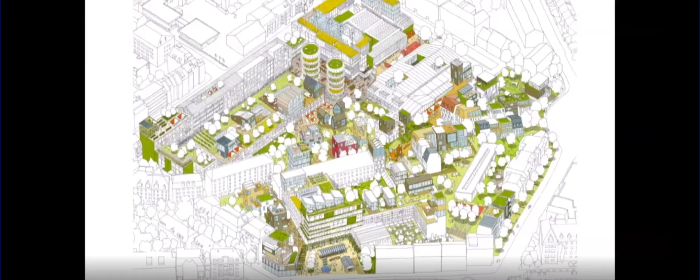energy consumption, energy production. We overframed and overbuilt the existing houses with extra structures based on the strategy of renewable materials, wood constructions, loam, earth constructions, a lot of greenery to trigger the microclimatic aspects of the situation, and also to have a kind of resilient community, completely self-sufficient when it comes to energy production and energy consumption, and to use every square meter for people.

So what we realized in this commission is that technically we have all the tools needed to develop a zero carbon neutral urban strategy. The most difficult thing is that we have to treat the way of living differently.

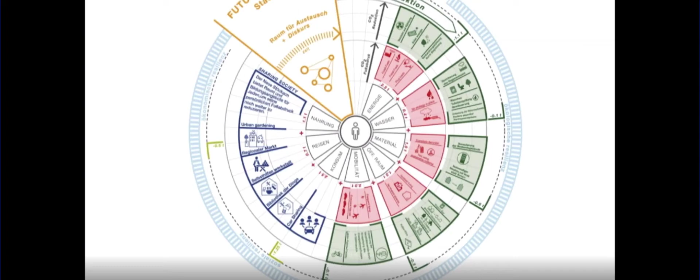Technically, we as architects know what to do, but the sharing society needs to have a change in society. That was one of the outcomes of this commission. I'll also show you, when it comes to commissions, how we deal with this resource base differently.

So we were challenged by a commission and competition for the Guggenheim in Helsinki. You may have heard about this competition, 1,700 entries. We were lucky to be one of the finalists.

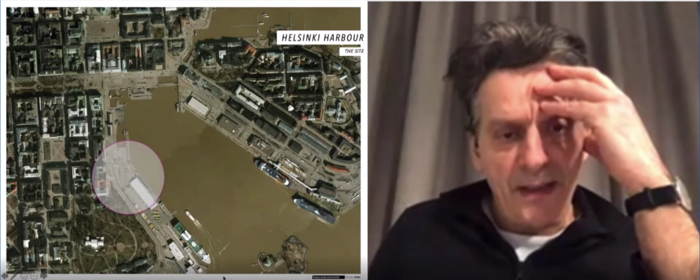I want to show you how we approached this architectural commission. The site is very nicely located in the harbor area, the harbor front - a perfect site for a museum, I would say, or you would say. But then on the other hand, why should we consume all of the area alongside this harbor for only one user group, for the museum goers?

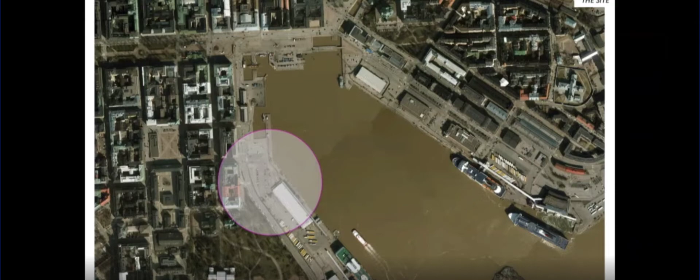We thought, first of all, let's check what extra quality we can place in that building besides just being a museum between 9 a.m. and 5 p.m. We took a careful look at what kind of public events happen in Helsinki, and where we can add some quality throughout the year.

That event calendar we developed together with some urban consultancies. We worked together with Gehl Architects in Copenhagen, you may be aware of this firm, and we wanted to generate extra value besides being only a museum.

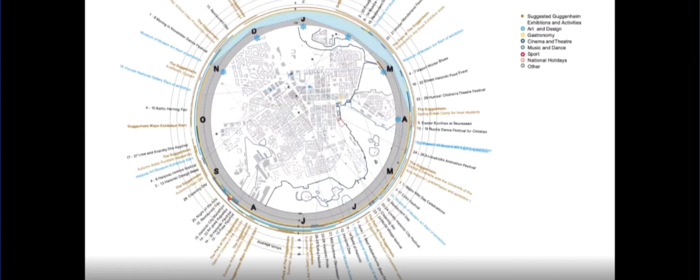We realized it would be perfect to have a public space where you can celebrate the festival of the sun coming back in the spring period, because like all northern cities, the lack of sunlight is a big issue. Celebration of light, having outdoor areas well protected against wind, nicely sun-lit, it's a quality. Having a public space not limited to museum goers, that's where we could see extra value.

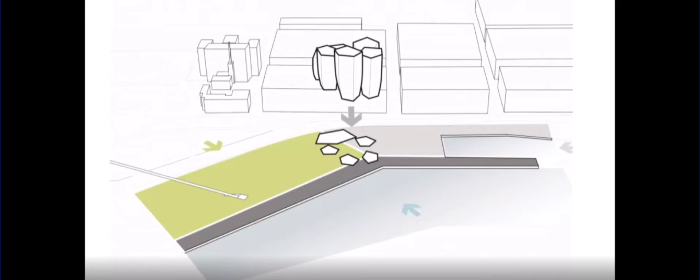The other thing was that we shrink the footprint of the building to a minimum. We only consume as much of the green area of the site as necessary. We only need a bit of a footprint, to open up the area for future development, save the resource of space, and generate a very compact, publicly accessible museum. For me, the strategy for a complete sustainable structure is that you don't start with materials, you start with the resource base, you limit yourself, you shrink the footprint as much as possible, and then you deal with materiality.

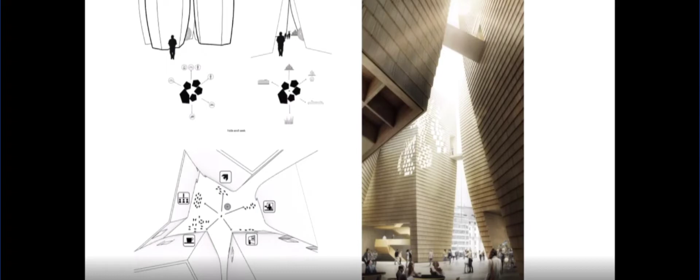So the five wood towers share a public space and shelter it against strong winds. They're placed like a Stonehenge, a 'lighthenge,' to allow sun penetration on the 21st of March and the 21st of September, celebrating the Festival of Light in the public space between the towers.

We thought about what else could be embedded, what people might look for when they enter the site. So we generated places like a viewing platform on the rooftop, and garden facilities next to the tower, in the sheltered outdoor area against strong winds. We looked for possibilities to have a 24-hour environment and quality for this museum.

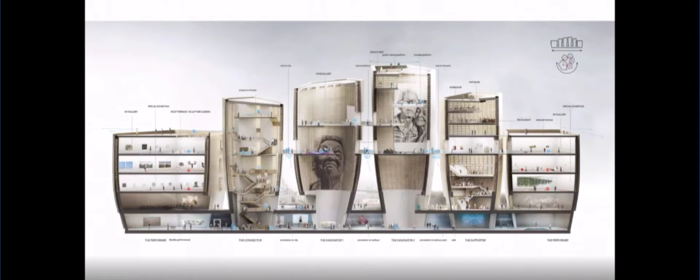I don't want to show you the interior, that's a bit too much for today. I just want to give you an idea of how we approach any of our commissions. And when this question of space is positively answered, then it comes to materiality.

You are very fast forward when it comes to wood constructions. We in Germany are running up a bit better now, so we have a couple of wood constructions coming ahead. When it comes to natural materials, the quality is not only that we found them, they are regrowing, and they don't make any waste. When we deconstruct something, we can reuse them.

There's another absolutely important aspect: the emotional linkage to the users. People like these materials, they like loam, they like wood, because it reminds them that we are part of nature. This emotional link to architecture is such an important aspect, it means architecture is kept for a long period, that architecture is durable. One of the second strategy measurements for good sustainability is that when you build, you should build for as long as possible.

All of our life cycle analyses show us that, especially as energy consumption becomes more efficient, the embedded energy of the construction is unbeatably high in comparison to the user energy. It only makes sense if the construction is in use for more than 25 years, it should be 50 years, should be 75 years. For example, a classical office structure in Europe has a durability period of only 25 years. So it makes sense to build for a long period.

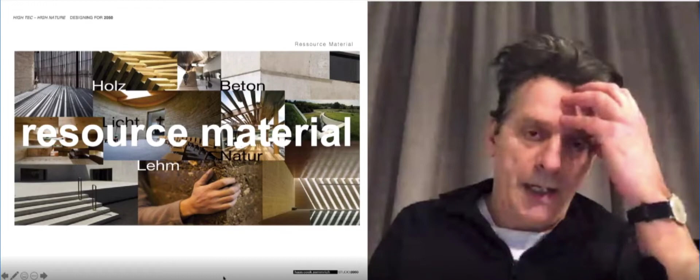A lot of pre-speech for materials. I hope a lot of architects listening to this lecture are aware about embedded energy and natural materials and their advantages, so I don't want to spend a lot of time re-arguing these classical criteria.

But again, it doesn't relieve you from a proper upfront strategy of how you build. I talked a lot about space, but then it comes to orientation, then it comes to the classical approach to architecture: build, first of all, as little as possible.

That is the approach of new simplicity, which we've talked a lot about in the last three or four years—every extra element you build is a resource. So the next strategy, beyond space and natural materials, is to just build as little as possible, and really think about the orientation. Where does an opening make sense? How much light do you really need for this kind of usage?

Because here in Germany—and in Norway it might be a similar situation—85% of the year you don't need any heating or cooling in the building, when it's properly done, when the ratio between openings and closed areas is properly considered. So simplicity means working best with the microclimatic situation, and then for 85% of the year you have no issue with energy consumption at all.

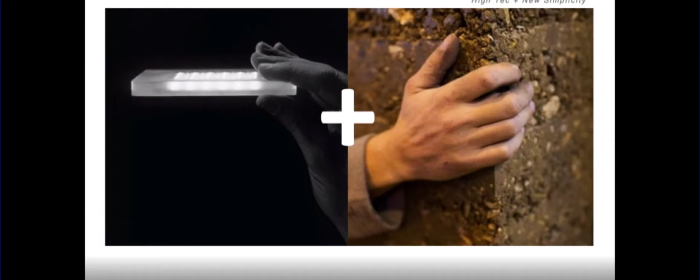That's how we work here with our architects. We think: first show me a design solution for how we can provide a building without any technology at all. It helps to think differently—too often we think from the very beginning that there is technology, heating, cooling. Get rid of this thinking, and it shows you different solutions.

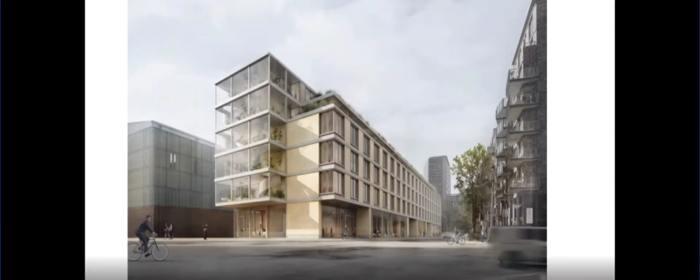I want to show you what we did here—now we come to loam and earth as a material. We were commissioned to develop a zero carbon building in the center of Hamburg for the Hafen City offices. So what we did first, after a careful site survey, was develop the concept of a wood construction with a certain grid.

We had to deal with an orientation issue that wasn't optimized, because the site itself, through the given urban situation, was a bit critical. So we developed different aspects for different facade elements. In the north area, we did a survey and realized that the wind speeds are still okay.

The street itself is quite protected through the dense urban environment against strong, heavy rains coming from the western area.

So we said, okay, in the northern area, we could really do a facade, a monolithic earth facade. The earth is a perfect situation. We find it everywhere. We can produce it locally, and we can produce this facade on site.

What we realized in our buildings so far is that with new aspects of better materials and higher efficient technology, transport is getting more and more important. The embedded energy cost, or CO2, or carbon footprint of transport is now much more than 10 to 15% of the embedded energy in the materials. So it makes sense that you use what you find locally as much as possible.

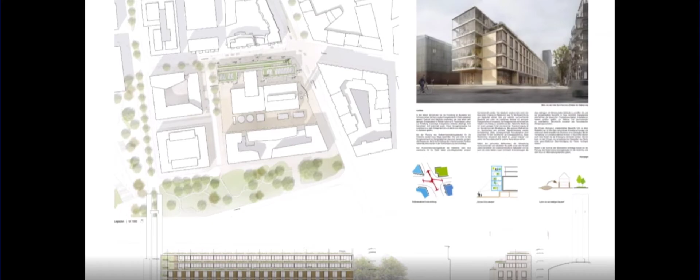On the south side, we have solar cells, vertical solar cells, for energy production. We have a wood construction as the basic grid of everything. The wood construction is not a glued one, so it's separable. We don't use any adhesives, and we have cork for insulation. We have a casein finish for the roofing, and everything is easy to mantle and to dismantle.

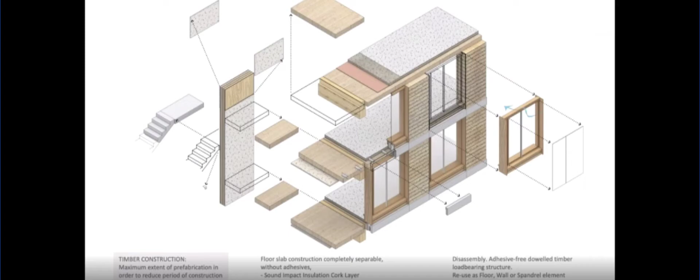So we had a radius of maximum 120 kilometers in calculation to bring clay, rammed earth, and materials such as timber to the site. So transportation is important.

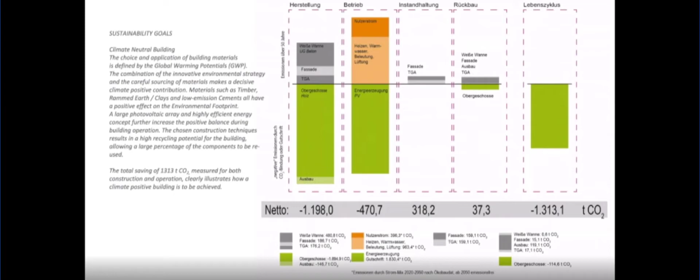That was also one of the learning exercises of a building we completed last year. That was a new headquarters for Alnatura, an organic food company here in Germany. We did with them a survey of sites for half a year to figure out what might be the best place for this new headquarters in the greater city area of Frankfurt or Darmstadt. And we finally ended with a former military camp area in the southern suburbs of Darmstadt, close by this forest. We found a couple of advantages there.

First, headquarters means 500, 600 people need to go there on a daily basis. So we have to have a good mobility strategy. We need to have public transportation in close proximity.

Next was that, and that was possible here, by reusing an existing site, we have lots of embedded energy we can probably deal with. This former military camp's sealed, paved structures were parking places for tanks, so we can use the sealed areas already for our parking lots if any are needed.

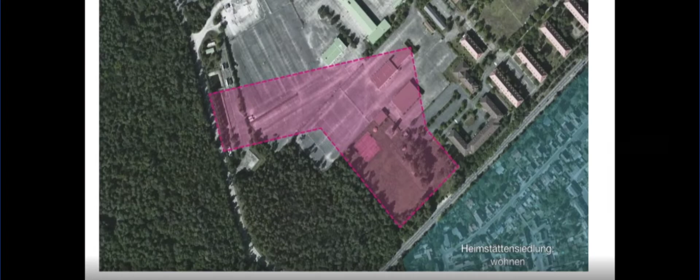We are in close proximity to a forest on the west side of the city. The forest is a perfect fresh air producer in the summer, so the microclimatic aspects are better to deal with.

And before we designed anything, we had a criteria list for this building - what kind of aims, what kind of targets we want to address with this house. That was a very important paper, ten sentences, which helped us develop that building further through the complete production and design process.

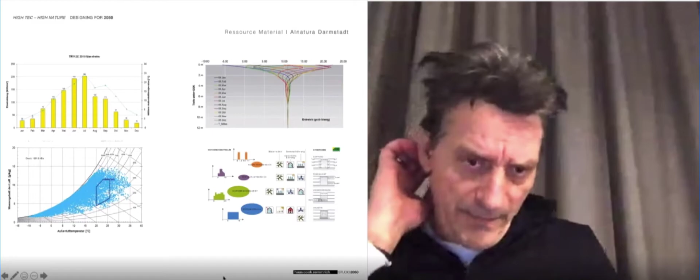We took a very careful look into synergies on site, so we did a chart where we looked into different user groups beside an office. What else can be done? We said we want to have a public restaurant - organic food means we want to show people, we want to invite people. Then we said if we redo that site, we should also have residential, we should have education. We convinced the client that together with the office structure, we should do a strategy for a kindergarten, for schooling - not just doing an office and dealing with one single user group, but have a complete strategy for all of the site.

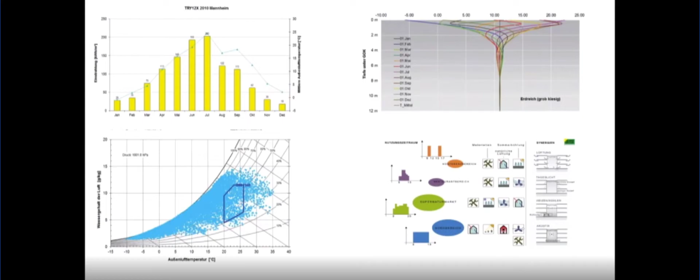That was very important. We did a survey of geothermal potential, of sunlight potential. The psychrometric chart showed us the qualities or different difficulties when it comes to humidity. And then we had a very simple approach - we made a design process.

We had a couple of models, and we tested them with the easiest challenges: how do we need to place the house on the site so we can get maximum daylight conditions? So we had a perfect north-south orientation to have at least one north facade, which allows us to have only light but no solar gains.

In Darmstadt, we have summer temperatures up to 40 degrees sometimes, so climate change already had an impact on that site. We had to deal with solar hits in the summer, and especially when it comes to an office building, solar hits are the most important aspect you have to deal with.

We wanted to have a daylight-driven office, not only to reduce the consumption of electricity, but we believe it's important for the well-being of people. You want to have a daylight accessible space. You want to be in connection to outside.

Today it's a beautiful snowy day in Stuttgart. You like to look out, you want to see that. So we developed a daylight-driven structure. We had some classical strategies: we opened the roof to the north to have direct daylight in the middle of the space.

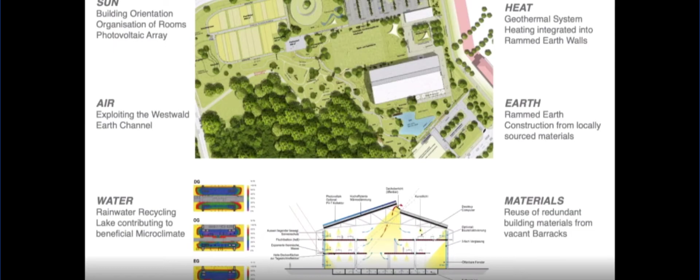The used air has space above the people's head, so the extra height also helps us have better air quality with less air speed in the building. This extra height helps us for a natural earth duct, an earth chimney, natural ventilation.

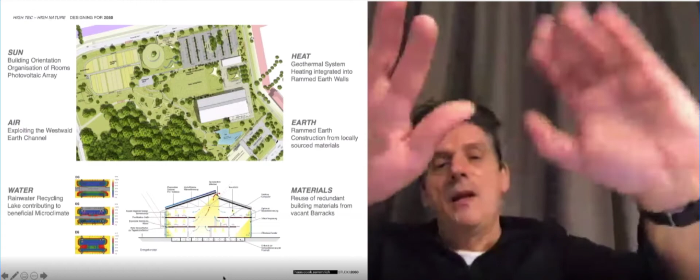So what we do is use the earth's soil. We have an earth duct underneath the building, and we suck in fresh air in front of the Westwald, and the fresh air is moved into the house by natural forces. The chimney effect of this atrium brings fresh air from the forest into the inner space. So: daylight, fresh air from the forest.

Then we collect every centimeter of rainwater, with an open cistern on the southern side of the house, and the little lake in front of the house helps the microclimatic aspects, cooling down the environment. We bring the green area as close as possible to the building, no sealed areas, in order to get rid of heat island effects in the city.

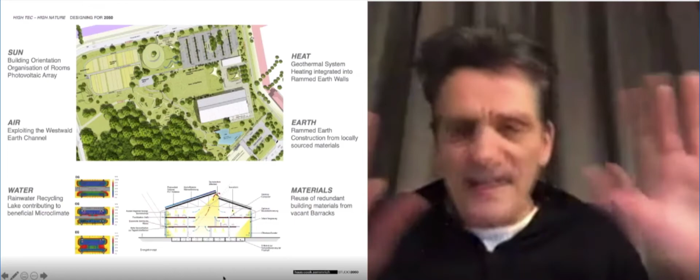Certainly we have solar cells on the roof, but that's only the last element. The first priority was everything that could be done passively, and we did that. We have the round-shaped building here on the north, that's the kindergarten.

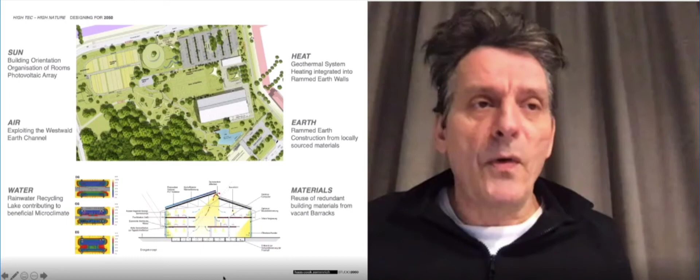We used parts of the existing paved areas for parking. We reused all the concrete we found on the site for remodeling the topography, because on a yearly basis we now have rainwater issues, heavy rainwater coming down. So microclimate, climate change matters, and stormwater management became more and more important. We remodeled the topography to protect the building against stormwater issues. So that was all passive.

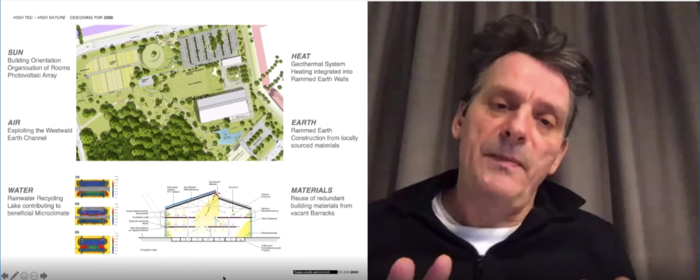Then when it came to materialization, we looked into natural materials. Here you see the concrete on the bottom right side, the reclaimed areas we found there—we reused them.

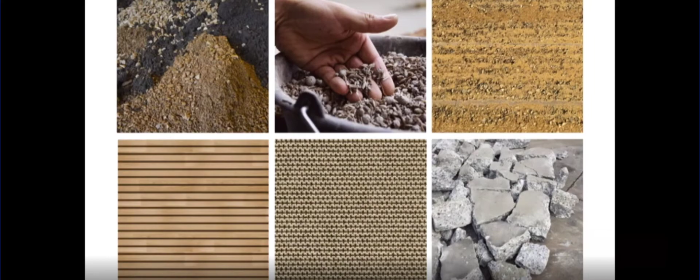For carpet, certainly there are cradle-to-cradle products on the market, that was sure, we can use them. Wood, and then it came to loam, to earth: how can we build a house out of loam again?

One of the strategy aspects was also clear that we don't want to do a classical office building with all these layered structures. The left section shows you how a classical office is done: you have the concrete levels, the slabs, a raised ceiling, a raised floor, the construction of the facade, the insulation, the outdoor claddings. Lots of these elements are technically driven and not absolutely needed.

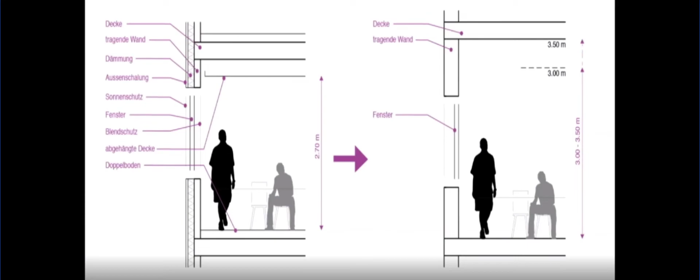If you reconsider everything, it would make much more sense, in terms of durability, to build simple, to give a bit more volume, to have materials which are active when it comes to thermal mass. Here in Germany, Norway is a bit different, but here we want some cooling aspects in summer, and what is technically needed is then attached. So lighting is not part of the raised ceiling, it could be a standing light or something you attach on the table. No raised floor, cabling should be open and easily accessible, so that the superstructure, the house itself, is as simple as possible. That was the strategy.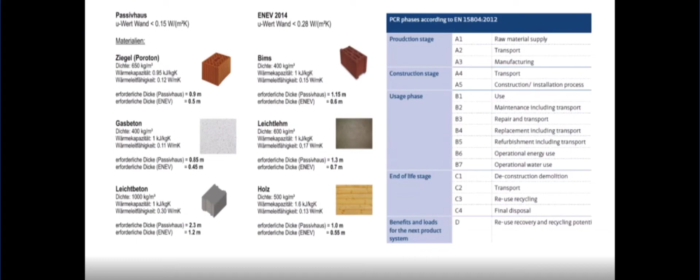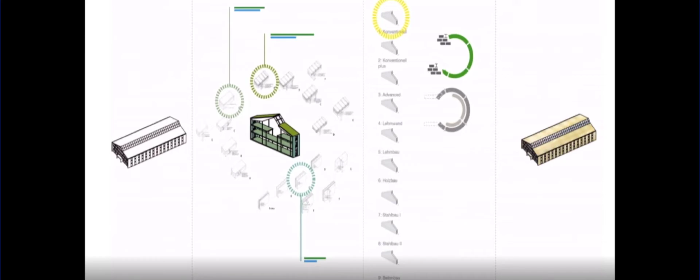Then we searched for materials we could use to carry out this strategy, and we did a typical life cycle analysis with stones, concrete, and wood. We sliced the house and calculated it with different materials to check, in the design process, what might be the best composition of materials we could embed. This is certainly more than a typical architectural office does, but we had good connections. I'm also a professor at UPenn, and we had a connection with the Technical University in Munich, so we had a partner who helped us deal with these measurements. And we came up with the idea that it would make sense to make a rammed earth facade.

There are many qualities we can see in that. First, we found earth everywhere, literally. Besides Darmstadt - the place itself is a sandy kind of area, so we had to bring in loam and clay from 100 kilometers away - and now I'm convinced that transportation is so important, because when we started this building I wasn't aware how much embedded energy is in transportation. So we brought in material from Westerwald, lava gravel from the Eifel region, but also some earth excavated from a tunnel project here in Stuttgart 21.

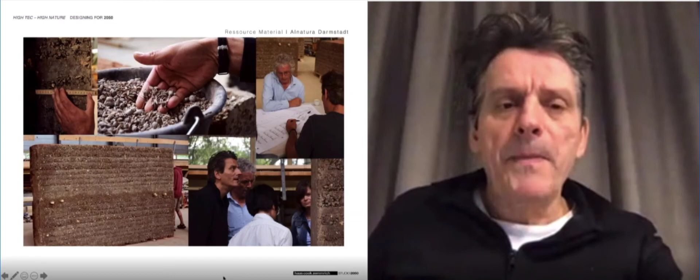We redid here the transportation, the new train station, and reused the excavated material in Darmstadt. When we started, I was not an expert in rammed earth or earth construction, so I teamed up with Martin Rauch - you may have heard of him - because we also realized we wanted to show people that this material is not anymore in the eco-niche. You know what I mean?

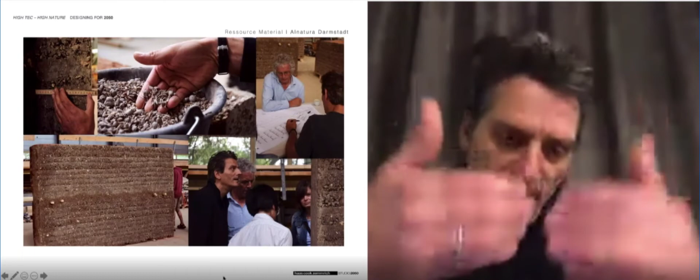It does have so many good aspects. It's a regulator for humidity. It's the only element that has the same speed of getting rid of water and taking in water, so no algae or mossy growth occurs on the surface - you don't have to do any cleaning work on a facade made with earth. It's such a stable, durable product, and it's completely natural, with excellent properties in terms of humidity regulation and thermal storage, and the building preserves its value over a long period.

So with all these elements ahead, we had to deal with the client's concerns about erosion. And then, since we'd thrown out raised floors and raised ceilings, we realized we needed a source for heating, because with our building strategy we could easily get rid of overheating loads in summer, but it cools down too much in winter. So we tried to engineer that facade - we asked, why isn't it possible to combine a rammed earth facade with a geothermal heating system?

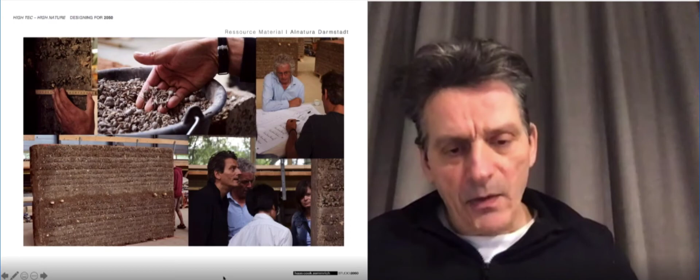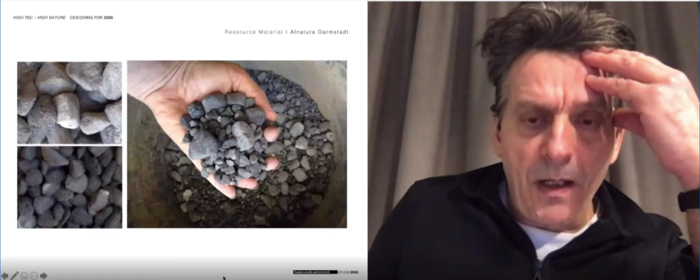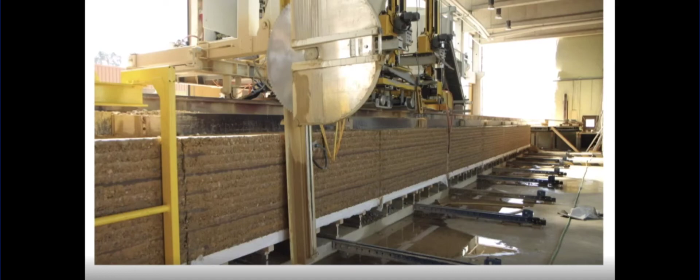At the beginning we thought we could use - I don't have the English term for it - Dinkelspelzen, spelt husks, where my hand is. We wanted to use a natural grain, but it didn't work out. We realized in the mock-up that the moisture value of this grain wasn't good enough, so we finally ended up with insulation material made of foam glass, a recycled product. We produced the rammed earth facade on site.

It was also a challenge due to the limited building costs. The building was not allowed to exceed a maximum cost value of 2,000 euros per square meter, which is low for such kind of office building in the Frankfurt region. I don't know what kind of building costs you have in Norway, but it was a challenge.

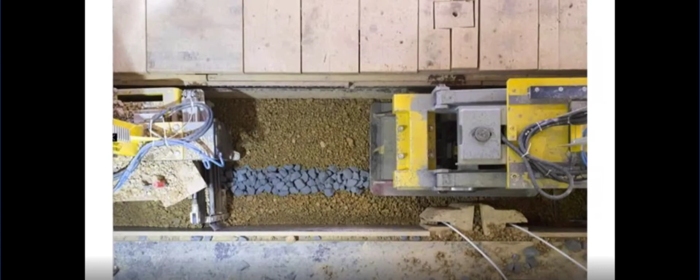So you see here how the formwork works. The building itself is composed of an insulated core, 17 centimeters of foam glass gravel. The outer rammed earth layer is 38 centimeters thick, and the inner is 14 centimeters thick. You see the little cabling coming out of this wood formwork? That is a water piping system we rammed into that inner rammed earth facade.

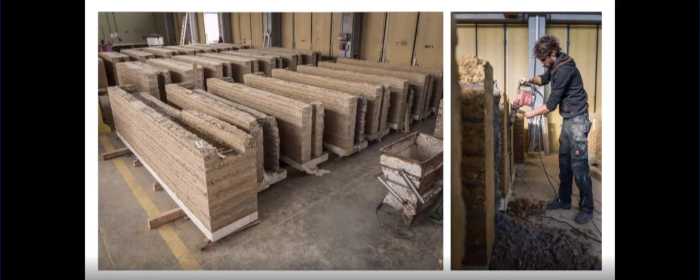So all of these were walls. One wall brick is 1 meter high, 3.5 meters wide, and 70 centimeters thick. It needed to be dried out for a couple of weeks. That was a coincidence here on site - we had these former tank halls which were a kind of workshop area for military tanks, so we reused them for drying out and producing the rammed earth stone elements.

You see here how the glass gravel is coming out of the middle. You see an end piece on the left side, and you see the trass lime lines, every 30 centimeters and 60 centimeters over the length of the wall, and at the corner every 30 centimeters. There are horizontal erosion barriers - this is clay and trass lime, and they were integrated into the rammed earth facade.

What they do is stir the surface erosion of the rammed earth. It's a little bit like river engineering works - they diminish the power of the water flow, so they minimize the erosion.

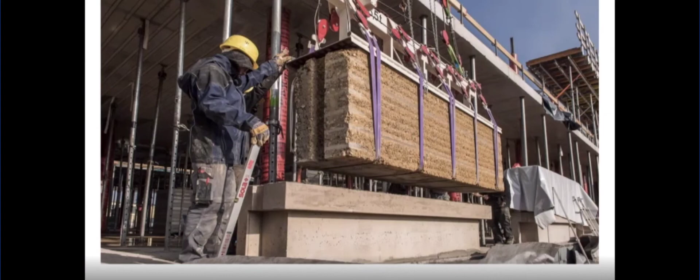Now the building has been there on site for 2.5 years, so it works brilliantly. It works quite well. We had some really stormy days, and we see that the erosion performance is perfect.

But you have to deal with that at the ground. You need to have a plinth, you need to have a foundation. That piece of concrete where the first brick is located is needed against direct erosion from the ground, so you need to have water protection aspects from ground level.

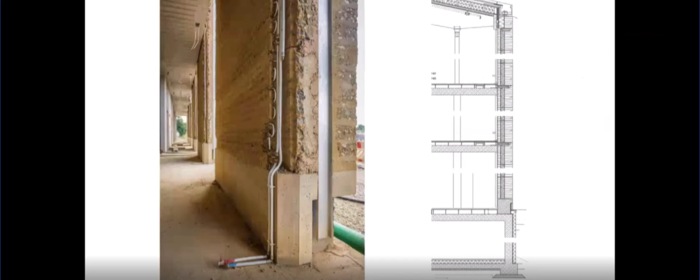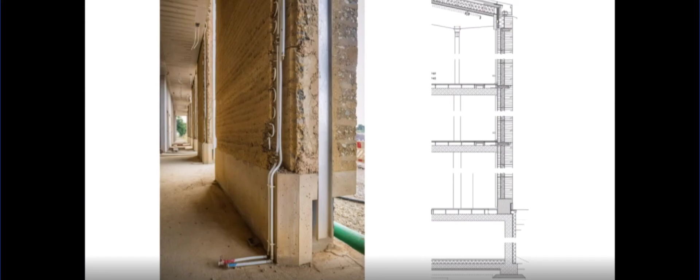Here you can see in the construction process - on the right side, the section shows you a bit the way it is constructed, and on the left side you can see how it is modulated. At site, you see the piping system coming out for the radiant heating and cooling, and the aluminium strip shows where the window needs to be attached.

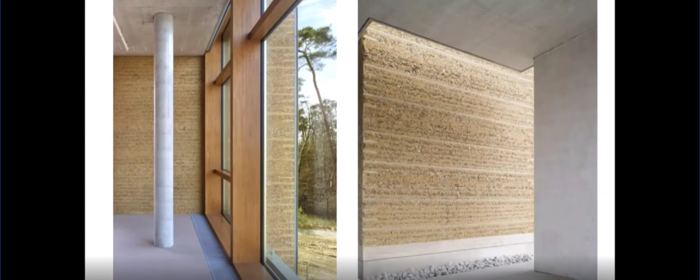Building under construction - I have to speed up a bit, running out of time. You see here the performance of the building inside and out. And as I said, the emotional aspect, beside all the extra qualities - the durability, the algae and moss, the health aspects of the building, the excellent properties in terms of humidity regulation, thermal storage and everything - but the emotional aspect for the people was important from the very first day.

We have had the building under survey and monitoring for 2 years, and there you see at the very end - I am soon finished. You see in the first chart on the left, temperature swings in summer, sometimes up to 40 degrees on a summer day. The gray bar shows the typical comfort zone for an office building, and you see how good the loam and rammed earth facade works.

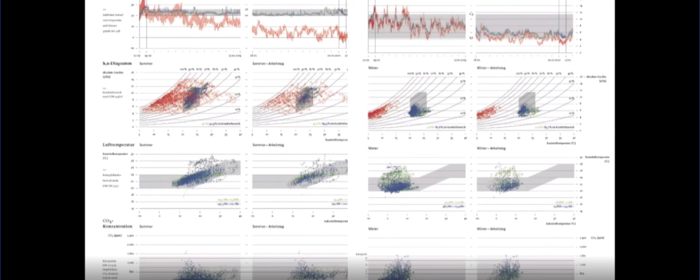You see sometimes the blue lines running out of this comfort zone - that was in the first year because we realized people didn't treat the ventilation and shading issues quite properly. But you can easily see in these charts how good the rammed earth facade deals with temperature, and even better when it comes to moisture and humidity. That's the right chart, where even without any technical support, the rammed earth easily balances the humidity in the building and provides perfect air quality.

So, overdone a bit, that's the inside view. It doesn't mean that everything is closed and small - it's a big building, a big room, very open and inviting. But the rammed earth facade was an absolute plus for that building, and hopefully it's a kind of breakthrough for this material here in Germany. Thank you very much for your attention.